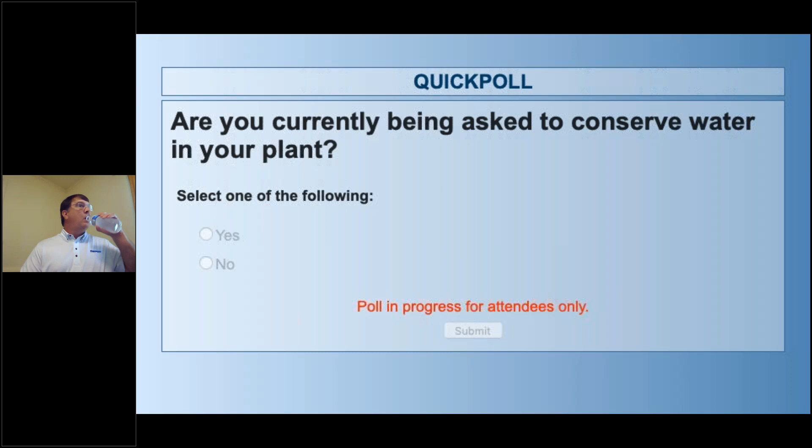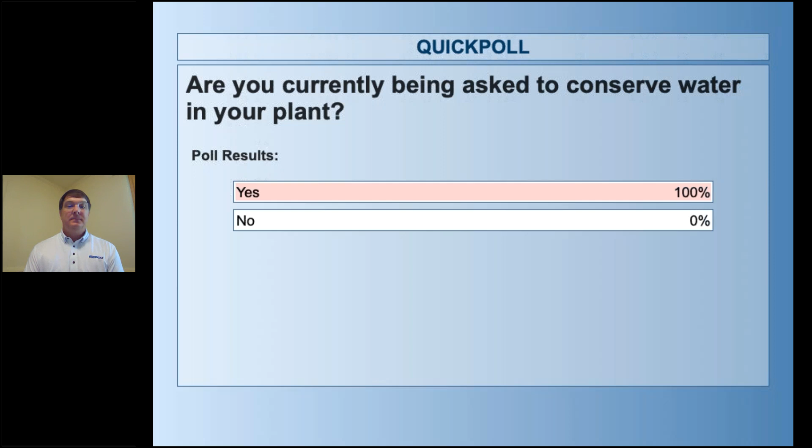We'll give you a couple more seconds, and then we will close it and get the results. No surprise, 100% of the folks on the line are being asked to conserve water, and that's why we thought this was such a timely topic. David, back to you. Okay, great, well thank you. Again, that's no surprise. This is a great lead.

That poll's a great lead into this, in a sense that everywhere I've been recently, we've been asked if there's any way we can help conserve water. You would never think that in today's industry, especially when they deal with millions of gallons of water a day in a paper mill, a chemical plant, an ethanol plant, that sealing water is such an issue. But as these slides go along, you'll see that within this industry, as stuffing boxes leak, as water gets dripped onto the ground or dilutes the process, you're talking about millions of gallons per piece of equipment per year. So we're going to focus on that, and show and pinpoint where to look for these problems and how to solve them.

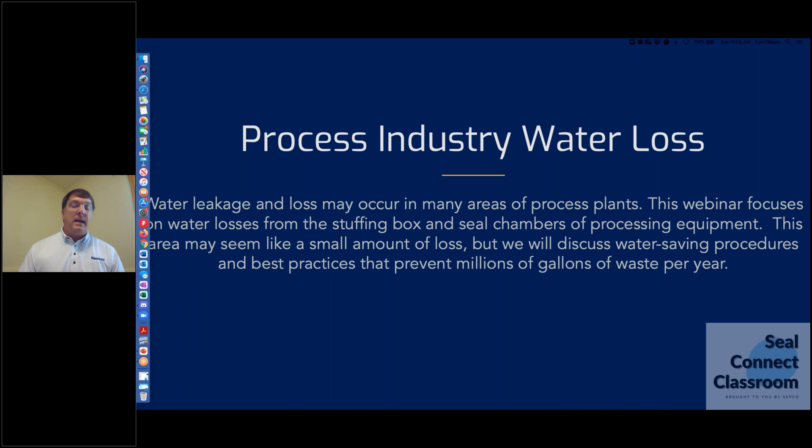So some of the sources of unnecessary waste: if you look at stuffing boxes leaking, you're all probably familiar with packing and how it works. When you walk by a pump and see it operating, whether it's an agitator, a mixer, or a process pump, you'll see the product or the dilution water leaking out of the stuffing box. That's some of the waste we're going to address.

You'll understand how shaft deflection affects packing, or how it affects a mechanical seal for that matter, and whether the lantern ring is positioned properly in the stuffing box. When we teach classes in the field, we want people to understand exactly where that lantern ring goes, because there's a port that comes in. That port is essential for the lantern ring to land within, because the lantern ring delivers water to the proper packing.

Damaged or worn shafts and sleeves are another issue. Not only does a shaft with a gouge in it affect whether the packing or mechanical seal works effectively, but sometimes when equipment comes back from repair, somebody has either bored out the stuffing box too much or built up the shaft sleeve too big. If the relationship between the OD and ID of the packing doesn't match, you're going to have problems and leaking packing.

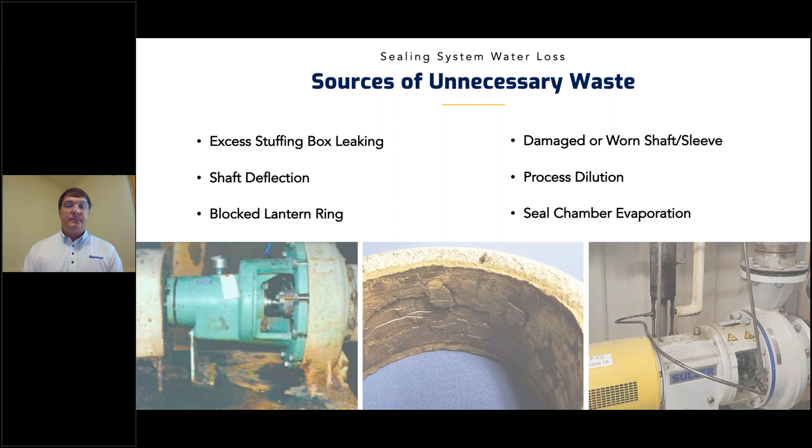So where are you going to find stuffing boxes? All over the plant — there are so many pieces of equipment you might walk by without realizing it has a stuffing box. In the paper industry, everything from hydropulpers to mixers to agitators. In petrochemical and ethanol industries, again mixers, agitators, augers, and similar equipment. Sometimes you'll see massive equipment with 12-inch or 13-inch shafts — don't be shy about going after those too, since they use tons of flush water to keep the process from leaking to atmosphere.

They use the flush water there to keep that from coming out. So we have to make sure the Fluid Sealing Association of America dictates 10 to 12 drops per inch of shaft size. So if you have a 1-inch shaft, you're going to leak roughly 10 drops per minute. And as that shaft gets bigger and bigger, that stream of flush water is more acceptable to come out. But about 10 to 12 drops per inch of shaft is what the FSA says, and that's our ultimate goal. Once we know that, we can control the flush rate and help the mills or plants save water.

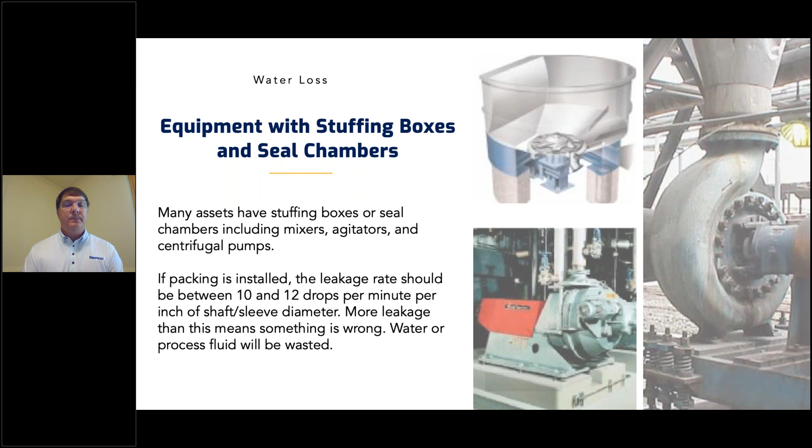One of the first things I want to talk about is shaft deflection. You've seen where you've got a solid shaft rotating inside a stuffing box. The first thing is it has to be concentric, meaning that shaft has to go through the stuffing box right in the middle, and if that's the case, you've got good maintenance practices. For instance, when a plant rebuilds a pump or a power frame, most recently we had a situation doing a refiner where we had to make sure that shaft was going through the stuffing box right in the middle.

What that does is when shafts deflect, when they move around, they wallow out the packing, meaning, as you can see in the picture here, when the shaft bends one way and the packing goes the other way, you're going to create a leak path there, and you have what they call a pressure drop in that situation.

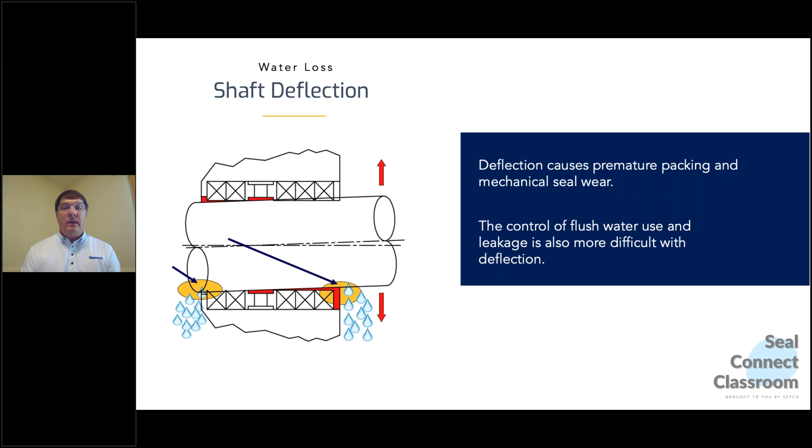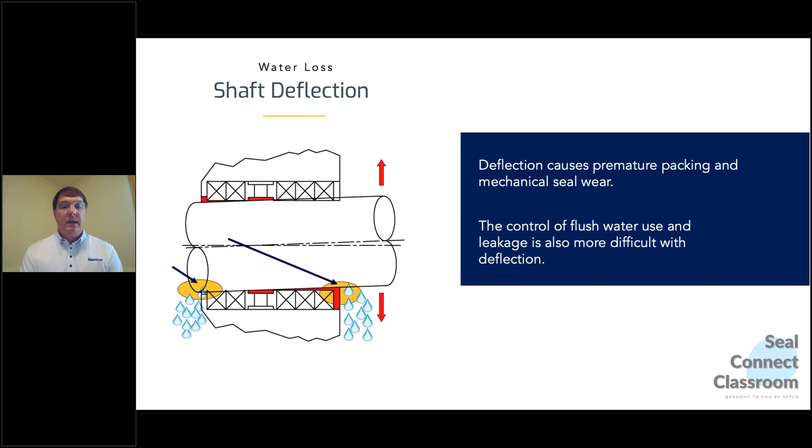And when you have a pressure drop, the flush water actually pours out of the stuffing box. The other thing I wanted to mention is this isn't only in effect for packing, it's in effect for mechanical seals too, because mechanical seals are loaded by springs and the faces have to remain together. So when that shaft deflects, it actually fatigues the springs, and if it fatigues the springs, you're going to cause a problem in the long run. You'll end up losing either the outboard or inboard seal on, say, a double seal. But that's something we'll talk about in just a minute.

Another thing to consider, specifically when packing a stuffing box: what we find a lot of times out in the field when troubleshooting applications is we pull out a set of packing, and inevitably what we see is a clogged or blocked lantern ring. What that means is over time that piece of equipment is operating, and because you're at a certain flush pressure, and typically when outside source water is concerned, there's one seal water pump that supplies, let's say, 10 to 15 pieces of equipment. Well, when one of those pieces of equipment goes down, or the packing or mechanical seal fails, you'll have a pressure drop in the system.

And when that happens, inevitably the pressure drop in that system will cause the process side of the equipment to overtake the flush system, and it can clog a lantern ring and plug the holes. What happens then is it overheats. The seal water cannot get to the packing because the lantern ring is the delivery system for the flush, and if it's plugged, it cannot get to the packing to cool it off. For all intents and purposes, packing will hydroplane on the flush system—that's the ultimate goal. But in this situation, if the lantern ring is plugged, you cannot get the flush system to the packing to cool it off.

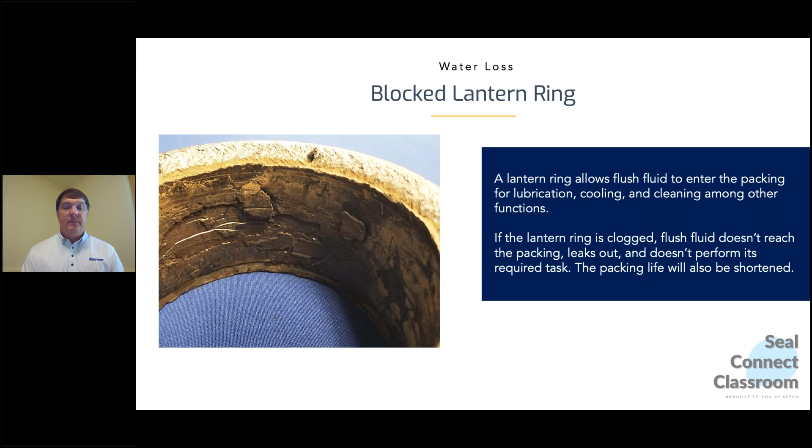And what that does is it actually changes the relationship of the packing in the stuffing box. And what I mean by that is it changes that relationship from the OD to the ID. So if you were putting, let's just say, 1/2 inch packing inside a stuffing box, and you're going to put a mechanical load on it, if you have wear on the ID and it's worn considerably, you've changed that 1/2 inch packing potentially to what now needs to be 5/8 inch packing.

So when you do that and we see this wearing, that's when you're going to get excessive leakage. So if you've got a flush system coming in and you've got an open gap on the ID, wherever that gap is, if it's on the ID or on the inside portion of the packing or the outside portion of the packing in relation to the process or atmosphere, you're either going to get leaking to the inboard to the process, or leaking to the outboard to atmosphere. Either way, that's wasted water. That's wasted process water, in the sense that when it comes in, it's got to go somewhere. And if you don't have the right relationship between the OD and ID of your packing, that's going to cause a problem.

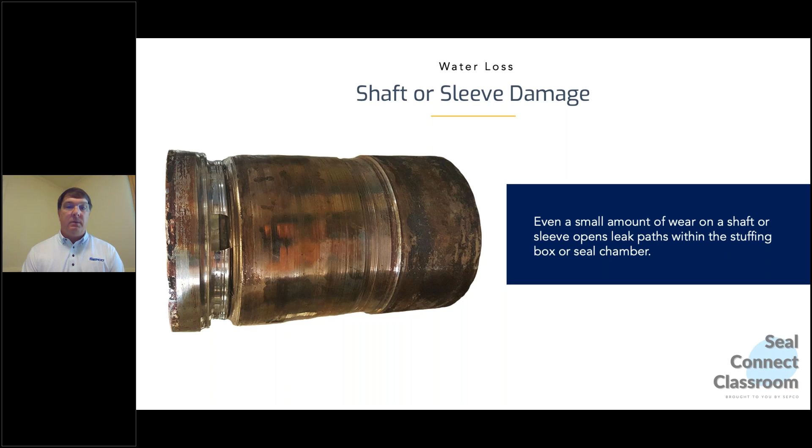And one of the biggest things that we see out there today - you won't realize it until we show some numbers here in a little while - but what you don't realize is when you dilute process, and this can pertain to liquor, it can pertain to ethanol in the ethanol industry, or what they call a mash slurry or what have you, and condensate pumps. I see this a lot. Anytime you introduce a diluted process or water into the process, you're diluting it.

And condensate, for instance, in every mill or plant, doesn't matter what type of mill or plant it is, has what we call condensate pumps. Condensate is a precious commodity in today's industry, and you cannot dilute condensate. You cannot bring in an external source of fluid and then introduce it - if you fail a set of packing or if you fail a mechanical seal, it cannot be introduced into the system. One, because the temperature is different from what is being pumped, and two, clean condensate is a lot different than non-potable water, and so you will foul that system.

And if you foul that system, you don't want to be the person with that on your resume. But the idea is to either use, one, the product being pumped to seal, or two, you'll have to use an external barrier fluid, and we're going to go over that here in just a minute as well.

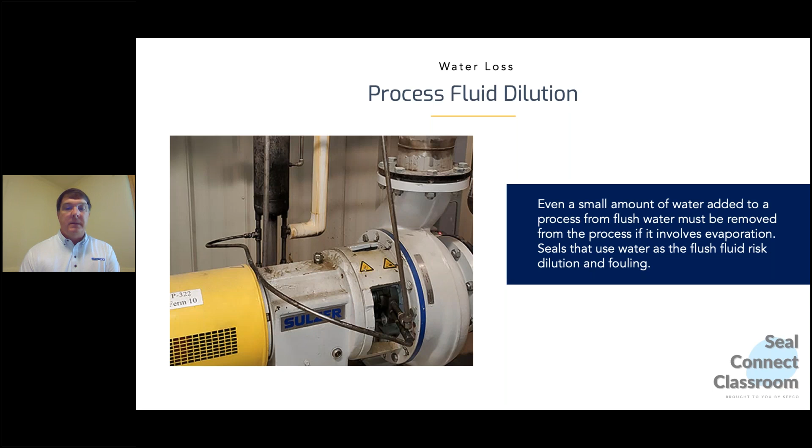So for instance, everything has a different flash point. Water has a certain flash point, liquor has a certain flash point, ethanol has a certain flash point. It doesn't matter what it is, but everything that we deal with in process equipment today has a flash point to it. So you could imagine, friction equals heat and heat equals wear.

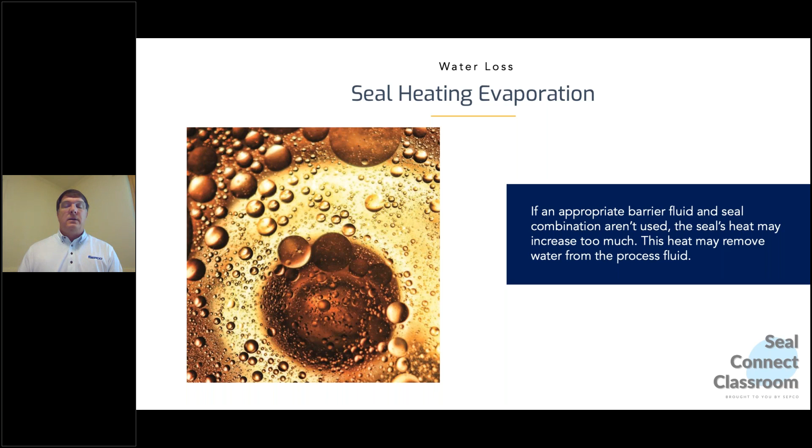You could imagine that when you are using a double mechanical seal and you're injecting an external flush or an external source of fluid into a mechanical seal, it stays in that little chamber. Well, in that little chamber you create friction and heat. Now, if whatever you're using as a barrier fluid is not compatible with a certain amount of heat that you're generating, it's going to flash off. And when it flashes off, it turns from a liquid to a gas. When it turns from a liquid to a gas, it expands. And so we're going to talk about that as well here in just a second.

So what we're going to go over is the stuffing box and seal chamber - there's 5 processes that can help prevent water loss. Given those examples I just named, we're going to show you guys how those 5 things can affect stuffing box reliability as it relates to water conservation.

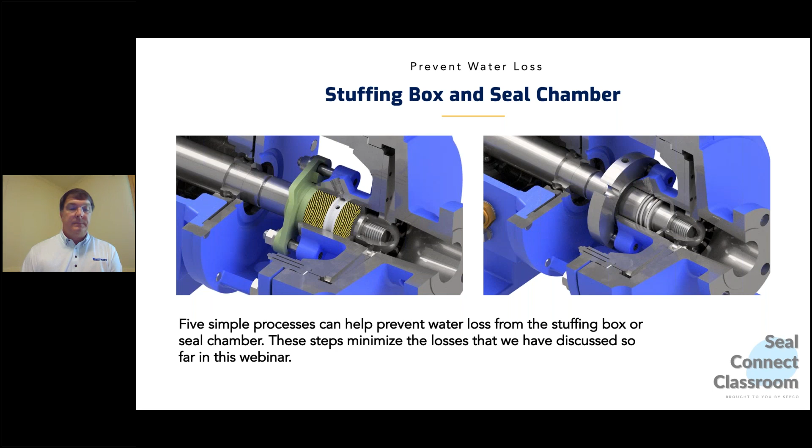The first and one of the most important things - we do these classes all the time where we go into the mills, into the plants, and show their mechanics the proper way to install packing. One thing people don't realize is when mechanical packing is manufactured, it's actually a little shorter lengthwise - like a 32nd of an inch.

The reason they do that is so that when you put a mechanical load on it from a gland follower, you have to radially expand that packing. And that packing has to radially expand to the point where on the bore of the stuffing box it creates a gasket, and on the sleeve and shaft it creates a dynamic seal.

So if you have 5 rings of packing in the stuffing box, and then you have a mechanical device like a gland follower pushing against it and creating a load, that mechanical load has to radially expand through the entire set. If it expands through the entire set, it'll do its job properly - every single ring will effectively be a seal as you go forward. But it's imperative that you do that.

When we talked about wear early on in this presentation - when you see wear at the very top of a stuffing box, let's say you unpack a set of packing out of a pump, and at the very top those first 2 rings you pull out are extremely thin and burnt. They're in terrible shape. And where those 2 rings were placed, you see polishing on the sleeve or shaft. That indicates the packing did not load all the way across the set - it only loaded right there at those first 2 rings.

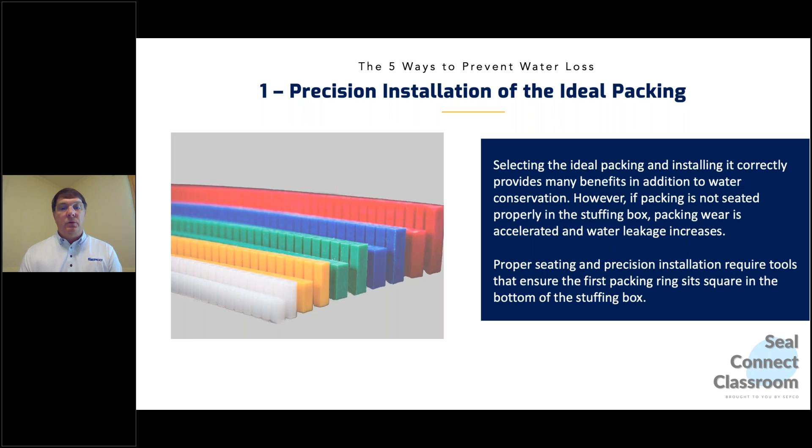Now if it only loads right there at those first 2 rings, the bottom rings aren't doing anything but just sitting there. So you can effectively have flush water coming in from an external source, and it would be unencumbered to the ID, meaning it would come straight into the process or the pump, to the flush port, and either go straight to the process or come right out the discharge side. That's why it's so important to get each ring seated properly, and there are tools out there to do that.

We'll properly help you inspect the stuffing box, make sure the shaft is concentric to the bore of the box, make sure there's no play meaning radial thrust, and the bearings are good. You really have to make sure you train the guys at the facility properly about seal installation.

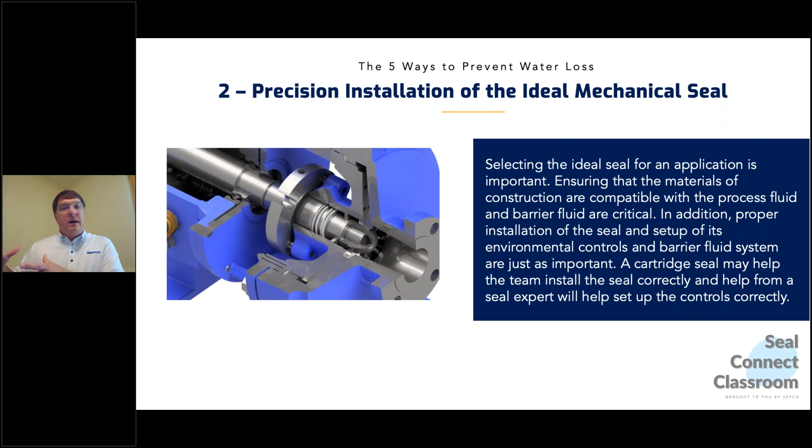You don't want to put a mechanical seal in wrong, because standard mechanical seals right out of the box can only take 3 to 5 thousandths TIR, either on the thrust side which is back and forth, or radial runout. You want to make sure the mechanics understand what that mechanical seal can do, what it's capable of, and then how to set up the proper environmental controls - whether it has a barrier tank or an external flush system - you want to make sure they understand how to properly set that up.

One of the things you'll see out there - cartridge seals have come so far in the last 20 plus years. I remember starting off in this business 26 years ago, and back then they had cartridge seals, but they were relatively new to the marketplace. Nowadays with cartridge seals, everything is a little more simplified. You put everything in place at one time, and there's a few maintenance procedures you have to document before you get that seal installed. But cartridge seals certainly do help with ease of installation these days.

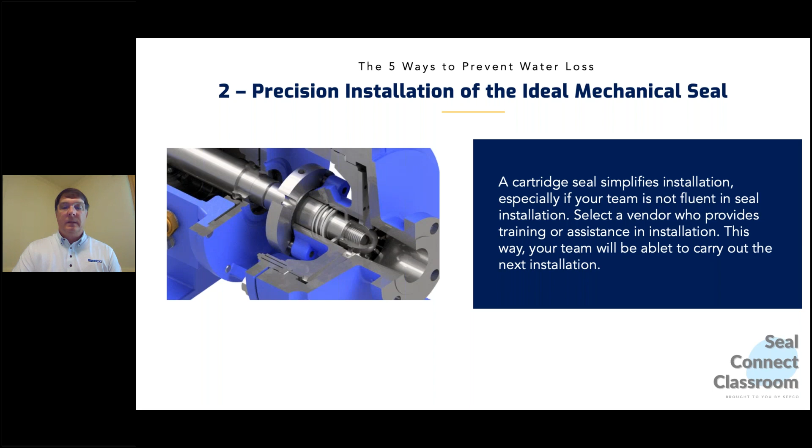So the appropriate flush arrangements and the way to set these barrier fluids up, barrier tanks or barrier fluids up - there are 100 different types of environmental controls, from everything on packing, where you have an external flush coming in, you have a ball valve to set the proper flow, and on the discharge side of the ball valve, you can actually set up how much positive pressure you want in that stuffing box. You can set that up with a mechanical seal as well.

There are barrier tanks that we like to look at, in a situation where you absolutely cannot introduce water to the process. You put a barrier tank there with a certain type of barrier fluid. We have all sorts of barrier fluids - there's hundreds of different barrier fluids on the market that you can use in certain processes that are either chemically inert, they can handle extreme high temperatures, extreme low temperatures, and they are good lubricators.

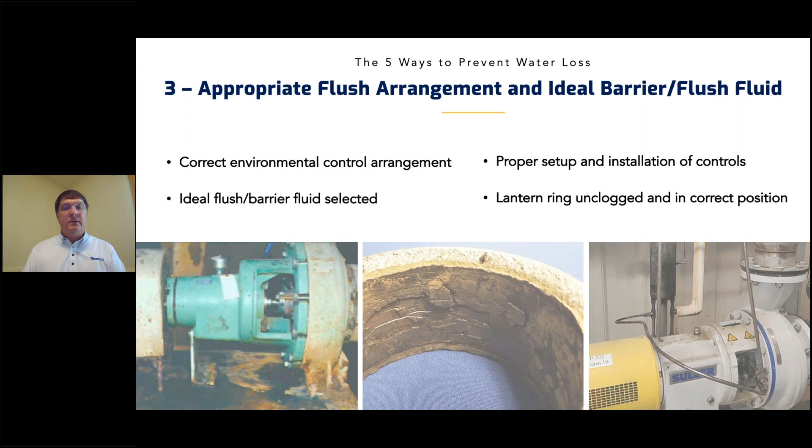Proper setup of certain controls - we want to know when we put these things together, there's bells and whistles that go along with some of these environmental controls that can let us know, hey, your inboard seal has failed. It's not working, and right now you're just dumping water or whatever into the process. We've got things out there that can tell us you've had a pressure drop, here's what you need to do - you need to shut that pump off, you need to fix that mechanical seal. Things like making sure the lantern rings don't get clogged up, that they're operating and working properly - there are all sorts of different tools out there to indicate that as well.

One of the big things that when I do training in classes today, when we do a lot of training out in the field, we want their maintenance guys to understand the relationship between loading a gland. When I say loading a gland, I'm talking about taking a wrench and actually tightening the nut and the fastener that brings the gland follower in, that loads the mechanical packing.

And not only just the installation of the packing and how that packing works internally, we also have to make sure that adjustments are made over time. And as that happens, what's going to happen with mechanical packing no matter what - packing is going to eventually wear. It has to, it's a textile. So over time, as it wears, the plant person is going to have to make an adjustment. And when they make an adjustment, that gland gets tighter and tighter and tighter.

But what we advocate for when we do classes and teach our maintenance people out in the field how to properly care for a stuffing box and conduct stuffing box reliability, is we want them to tighten these gland followers one flat at a time, maybe two flats at a time. The reason for that is certain textiles we use in packing, doesn't matter who it is or what it is, will transfer heat differently than other textiles. For instance, a carbon yarn or a graphite yarn has a much higher surface speed than a Teflon yarn or an aramid yarn like a Kevlar. And the relationship between how that gland follower is tightened and how much heat that packing can transfer is different from product to product.

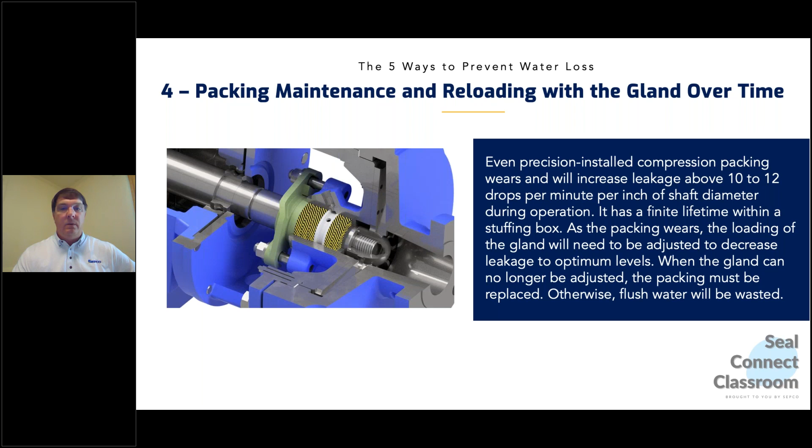So we want everyone to understand and know that gland follower is there for a reason - it has to be tightened over time. But at the same time, we want people to understand that tightening that gland follower does have a repercussion. You can't just come in, tighten it 3 or 4 turns, and then walk away, because you're going to burn everything up. And once you burn everything up, it glazes, the packing will glaze, and then the flush water being used to cool it will almost always start flashing off, or it'll just come pouring right out of the stuffing box or going right into the process. We want people using our products, or anybody's products, to understand the relationship between that packing follower and that packing and how it's being used.

Shaft stabilization, as we talked about earlier, is very important.

When we talked about deflecting and stabilizing a shaft, excuse me for one second, I'm just going to take a real quick swig of water. There we go, that's much better.

As we talk about shaft stabilization and how do we keep that shaft centered in the stuffing box, there are many different types of ways to do that out here.

The first thing you have to do before you do anything is when you're rebuilding, when the customer or the plant's rebuilding their equipment, they need to make sure the bearings in the power frame are good. We want to make sure those bearings are actually brand new in the sense when they come back and rebuild a piece of equipment.

But the other thing we can do is if we've got long overhung shafts, like mixers, agitators, hydropulpers, big augers, things of that nature, we want to make sure. What happens is the bearing could be 3 to 5 feet away from the stuffing box. So you've got that long overhung shaft, and it has a tendency, because it's got a blade on it, and that blade's turning with that shaft, that it can wobble, and it has a tendency to wobble.

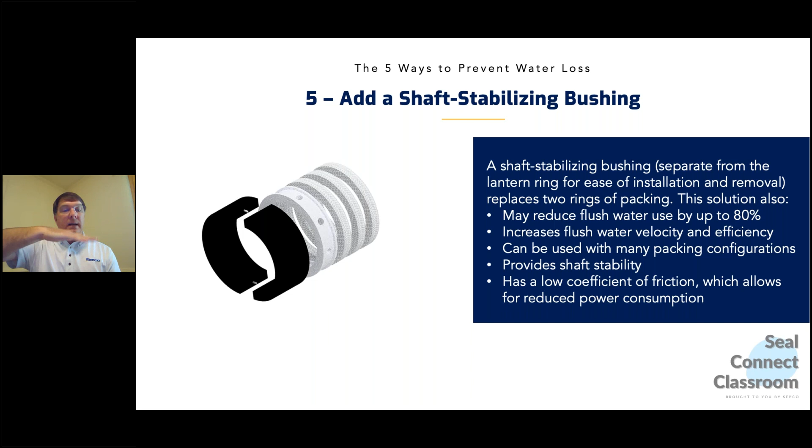Well, in order to change that, there's certain products out there that actually you can stabilize the shaft inside the stuffing box, through things like high temp thermoplastics that are extremely stable, thermally stable, that can handle any kind of chemicals, that go 0 to 14 on the pH scale, but have bearing quality characteristics and very low coefficients of friction. Good thermoplastics that have a carbon graphite filler in them or something like that, you can put those in the bottom of stuffing boxes, and you can keep those shafts from deflecting and keep them steady.

And when we do that, what happens is we don't change that OD-ID relationship with packing or even a mechanical seal. We keep the springs from fatiguing. We keep the packing from getting knocked around in the stuffing box. And in total,

one of the most unintended consequences from this stuff is it actually helps conserve water, because you can imagine if that packing always stays in place, or that mechanical seal always stays in place the right way, that the water that's being used to flush it remains steady, at 10 to 12 drops per inch of shaft OD and ID size. Same with the mechanical seal.

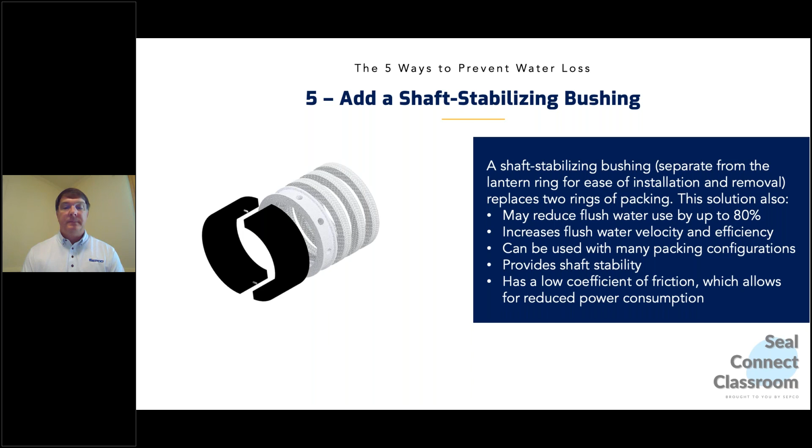So the next couple slides, guys, I'm going to be able to give some really cool case studies that we'll be able to show you, where we actually save water, where we actually help the customer. And this will maybe give you guys ideas where it might be able to help you in the future.

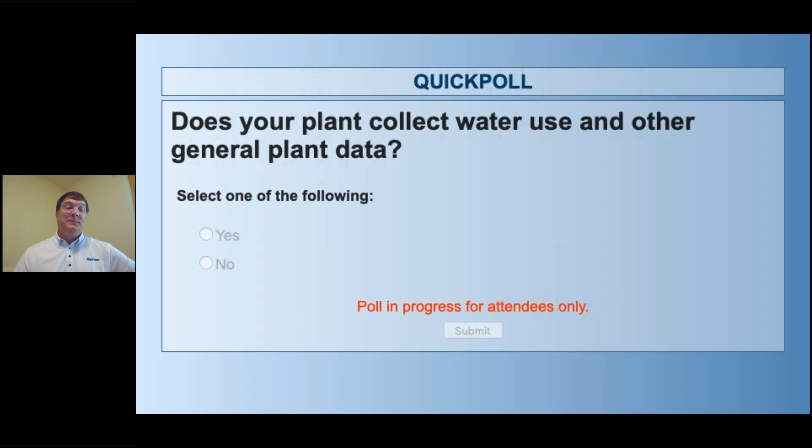All right, good deal. Before I go further with this, I did want to share one thing with you guys. Here just recently, I was with one of our distributors, and we were in a plant that was getting ready to install flow meters on their big 12-inch lines that are coming into their plant.

And they will get from that, they will get a data point. And these aren't lines for each individual pump. These are flow meters, these big, massive industrial sized flow meters that they can get a reference point of how much water they're bringing in total. And then on top of that, be able to, from there, we can hopefully gain data from each individual pump. And from each individual pump, we'll be able to tell, all right, we'll have at least a ground point.

We'll have a data point to start from, and then we can say, hey, from these 40 million gallons of water that you're consuming, over time we're going to be able to say, of that 40 million, we saved you 2 million or 3 million or whatever it might be in total water savings. And that's the whole idea.

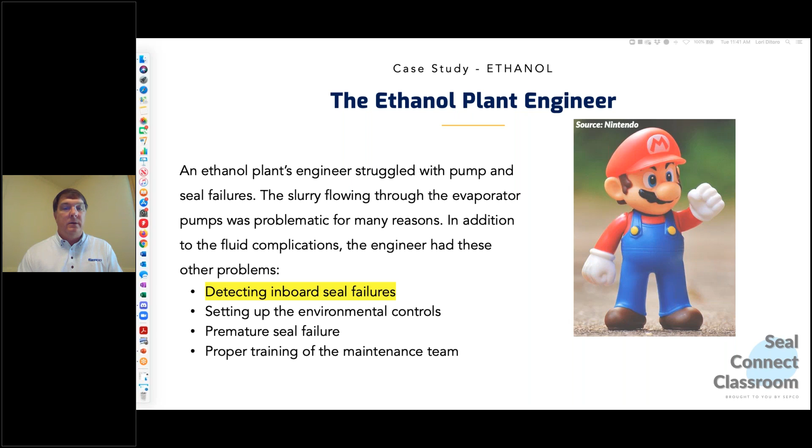So the first thing that we did, when -- I'm sort of being redundant here -- but he had a hot, sticky fluid that was actually a big slurry, and their whole idea was they were trying to make a byproduct out of it, in which they needed to get the water off of it. They were evaporating the water off of this process.

Not just on this ethanol specific slide, but I wanted to mention I actually have another end user in an acid plant who was trying to take water off their process as well. Very similar application -- a slurry, sticky, a mess -- and we had to help them get the water off of the process, or prevent it from entering the process, so that they could move forward.

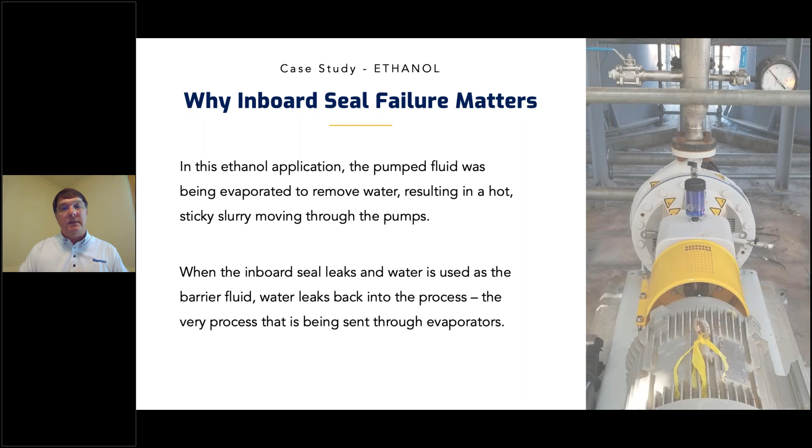But as you can see, as the inboard seal leaks, if you don't have the proper environmental controls, you just don't know, and you don't have control over the flush that's going into the system and diluting your product.

So one of the things we look back on -- again, I'm being redundant here -- but when you've got a hot slurry, you've got to take into consideration face materials, different types of face materials. In a slurry application where the equipment's moving and there's potential for the slurry to get inside the seal faces or on the mechanical seal itself, you have to know what types of material to choose.

For those of you who have sold mechanical seals, take one mechanical seal -- say a 1 3/4 inch mechanical cartridge seal, double cartridge seal -- it could have 20 different types of face combinations, 10 different types of O-ring combinations. You have metallurgies to consider. You have everything to consider when you're looking at that.

So when you guys come to us and say, David, Terry, Zach, Steve, whoever, I've got this application, the first thing we're going to say is, what are you pumping, or mixing, or agitating, whatever -- because that's just kind of geared into our brains. We need to know if we're going to use carbon faces, carbon versus silicon carbide, or silicon carbide versus silicon carbide, tungsten, and on and on.

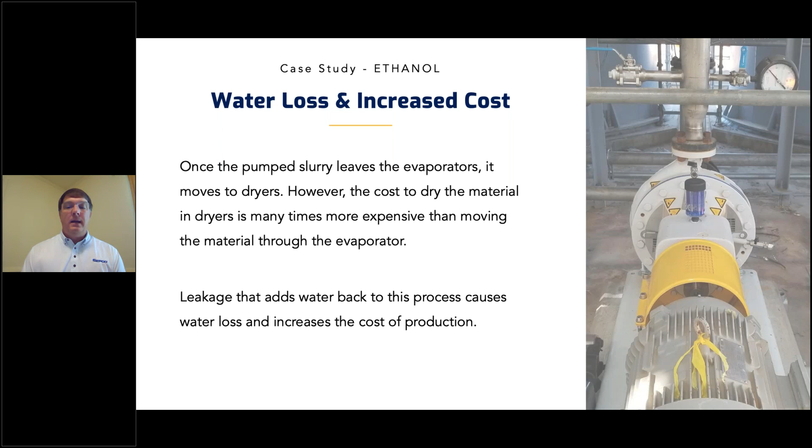And what type of springs do we need? Do we need a single spring? Do we need multiple springs? Those are the things we consider when we look at each application. There are a lot of questions we have to have answered, and that's part of the selection process.

In this situation, we were able to understand what they were trying to accomplish. One, we knew they did not want water in their process. That was a no-no, we had to get rid of that water. That was the biggest thing.

Two, we wanted to make sure that the longevity of the mechanical seals went from one time to another. In this case, it went from 15 months, where their normal seal life was, what we call mean time between failures, to a 37-month period. So we more than doubled it.

The way we do that is, in this case, we needed a double seal that had a barrier fluid tank. Instead of an external flush, we had a barrier fluid that was compatible with the material and process they were pumping. But we had to know that the fluid in that seal, as it transfers from the barrier tank through the mechanical seal, stays at a certain temperature.

So we were able to put a pumping ring in there. That pumping ring helps facilitate the true convection of the tank. But we also had to make sure we use the right fluid. In certain cases you can use certain barrier fluids, a mineral oil, or an ethylene glycol or propylene glycol type mixture, something that's compatible with the process if the inboard seal fails.

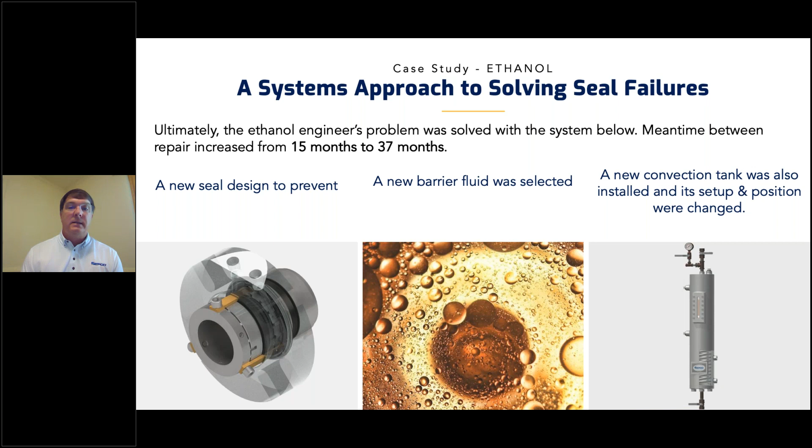All right, so that was ethanol. This one's a great case study in pulp and paper.

What these guys wanted to do, their biggest thing was they were pulling off of an aquifer, and their lease was running up. They had to show the people who ran the aquifer that they were going to be good stewards of the environment, that they were going to start conserving water and show them how. This is where we come in, and we're able to document these kinds of water savings for them and show them exactly how much water they can conserve.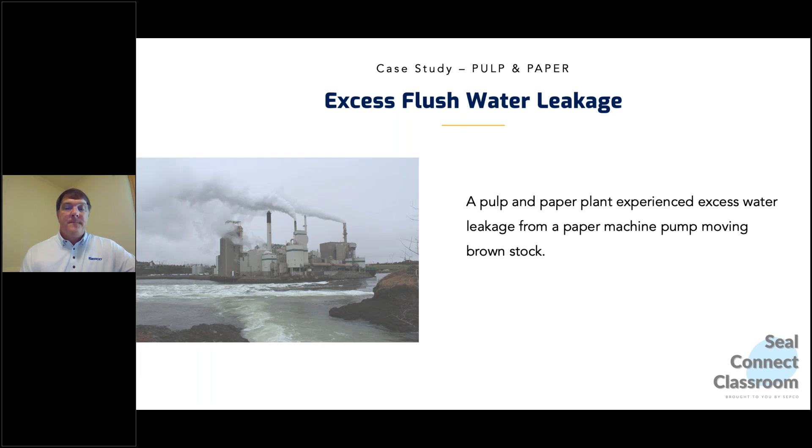One of the things was, that previous slide had mentioned this was a brown stock pump. It's very common in the paper industry. You see brown stock pumps, bleach stock pumps. Stock pumps are a very common pump inside a paper mill.

I'm sorry, Lori, can I move? I need to move one of my things so I can see. I apologize, guys, I'm having technical difficulties.

So one of the things we were able to do, you can do this through a flow meter, using an ultrasonic flow meter. You can rent them, or sometimes you can just use a 5-gallon bucket to measure water and get that good data we're talking about. You can actually put a bucket underneath a stuffing box sometimes and collect that water as it's coming out.

Then you can empirically show the mill, hey, this is how much water was leaking out of the stuffing box. From there, we're estimating that this much is going into your process, but we know this much is going to ground and draining. And where does it go from there? It goes to the wastewater treatment plant, where it has to be treated, and we know it's being wasted.

We knew from measuring this water that we were getting 4.23 gallons per minute. That's a lot of water coming out. That was a stock pump, and that stock pump probably had a shaft right at 4 inches thick, or less. Knowing those stock pumps the way I do, that was probably a 4-inch thick stock pump.

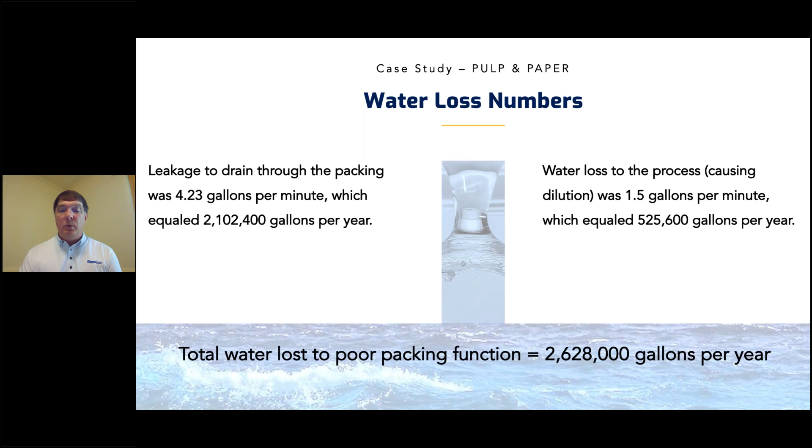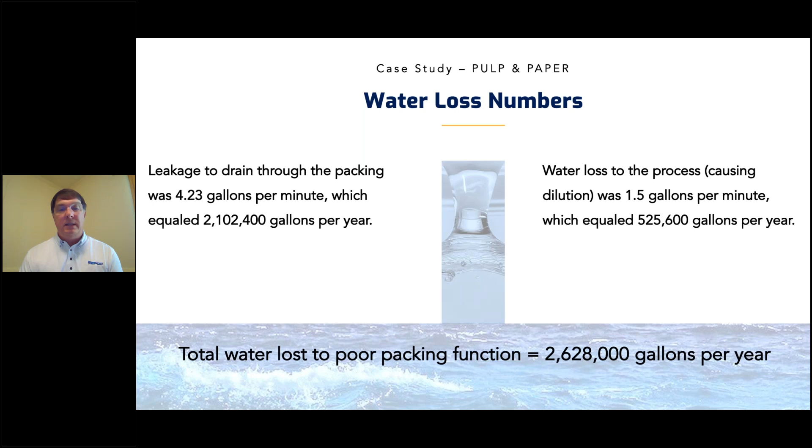Over time, that translated to a lot. So the total loss to doing this poorly was about 2.6 to 2.63 million gallons a year. That's a lot of water for one pump, and this isn't uncommon at all. It's something you see regularly in a paper mill quite often.

The way we fixed this, just in packing alone, was we took a high performance packing, a carbon braided packing, instead of using Kevlar or pure Teflon or what have you. When the gland follower, remember, the better textiles we use, the better material, the more that packing can transfer heat. So we wanted to make sure we could affect a good gland load by putting pressure on that packing and between the lantern ring and the packing. By doing that, we added a great packing with a 4,000 feet per minute shaft speed, so that's very high.

We introduced a better, more high performance lantern ring. What I mean is, sometimes you'll see these lantern rings come out of stuffing boxes that are flimsy, easily broken, easily plugged up. We added a high-end lantern ring with a bigger width, and on top of that, we added a better flush system.

What I mean by that is we take a line in and ball valve it off. We use a ball valve to control the flow, and we can measure the pressure at that point. On the discharge side of the flush, we put another ball valve, and from there we can maintain and dictate what that pressure is, creating a positive pressure in the stuffing box, only allowing a trickle to come out of that flush line, controlling the flush coming out of the packing and the gland follower through the mechanical load.

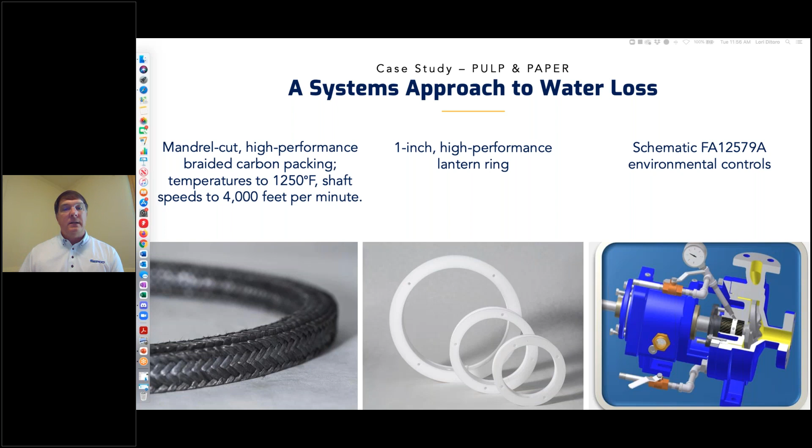After we put them on the right track, we documented through data what they could save. The new system eliminated flow to the drain—now I'm talking what comes out of the stuffing box and what comes out of the discharge side of the flush. That was over 2,100,000 gallons per year. That's a lot of water with one pump.

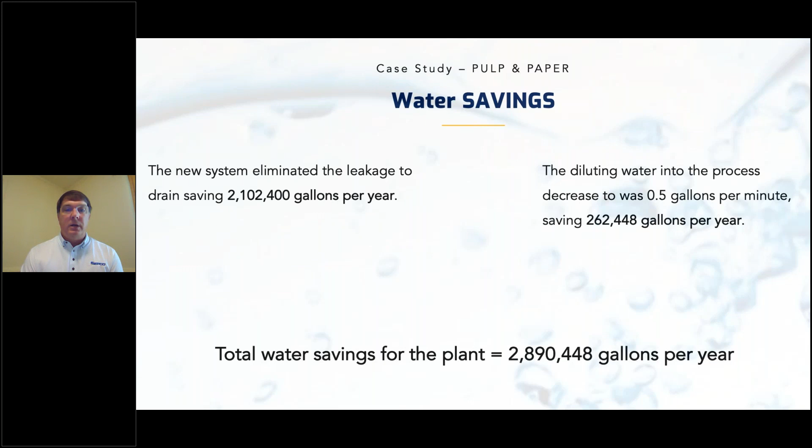The dilution rate into the process, we were able to get it down to half a gallon a minute, and that was over 262,000 gallons per year saved on the dilution rate. So the water conservation on this one pump that we were able to show, and got a good cost saving signed off on, was 2,890,000 gallons per year that we documented to them, saying this is what we can do per pump if we got the opportunity.

Now, not every pump in the plant is going to be that bad of an actor. That was just a particularly bad actor, but you get an idea of what we're talking about with water conservation. Nowadays, in such a stringent time, each plant has to be a good steward of the environment and show they're making an effort to go from one bad actor to another and fix that. We can certainly help them do that.

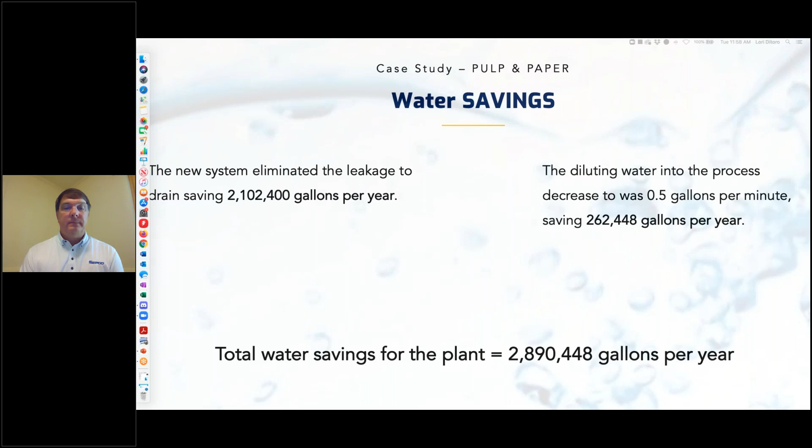We have not gotten any questions at this moment, but we have about 2 minutes left, so I'm going to ask one question I thought of. We're talking about agitators and mixers having to have flush—is there a technology available for mixers and agitators that doesn't require flush, that might be beneficial to pulp and paper or food and beverage or ethanol or anything like that?

Oh yeah, absolutely. Right now there's air seal technology out there that's just gangbusters. In terms of water conservation, this would be the best of the best, because you're not adding any water. If water is the enemy, and they're okay having a little air in their system, air seal technology is the new wave of where we're moving on big hydropulpers, big agitators, mixers, augers, things of that nature, where we just don't want to add any flush water to the system anymore. Air seals are what's taking over right now—we see a lot of that these days.